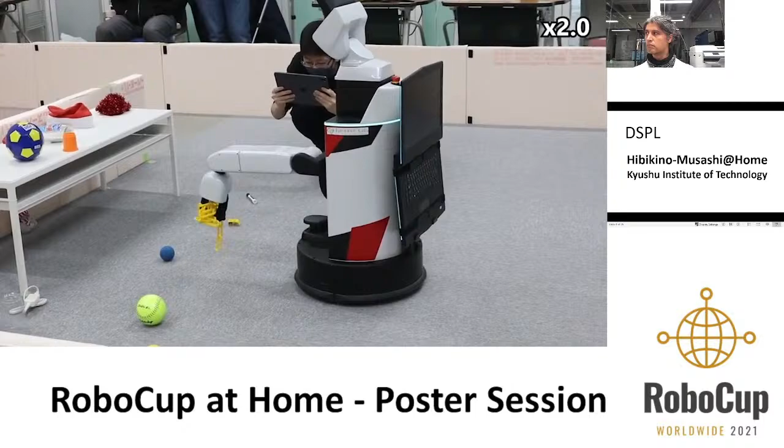Hello everyone, we are Hibikino Musashi at Home. We will introduce our techniques for our object recognition system.

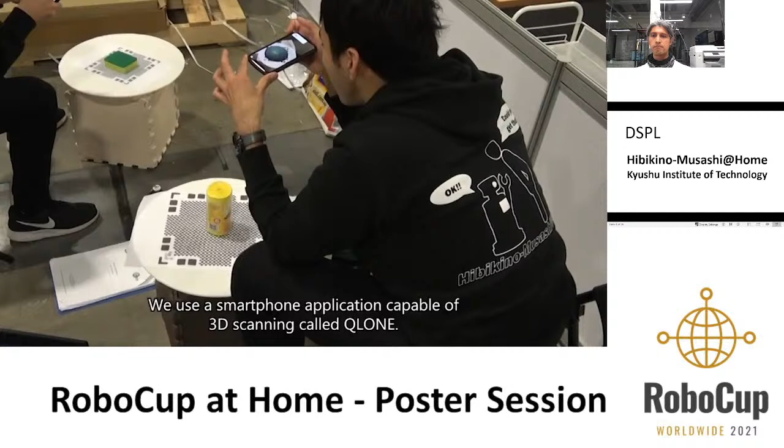We use YOLO for the image recognition system. We need to train YOLO with a large number of pictures. First, we create a 3D model of objects using a smartphone application capable of 3D scanning called QLONE. By using QLONE, we can easily and quickly create 3D models of an object by shooting it on a dedicated marker. We use a turntable to create a 3D model, however, in this method, the bottom surface of the object could not be shot immediately. Thus, we shoot two flipped upside-down object 3D models of the same object to make a complete 3D model.

Then, we combine 3D models of the object to backgrounds. For the backgrounds of the training images, we shoot background images, for example, a table, shelf, and other items. To adapt to various lighting conditions, we apply the automatic color equalization algorithm to the generated training images.

To incorporate the object images into the background images, we define several object locations on the background images. By placing the object images on the defined object locations, the training images for YOLO are generated autonomously. By this method, we can generate 400,000 training images from 15 class objects and 306 background images, for example. Annotation data for the training images are generated autonomously because object labels and positions are known.

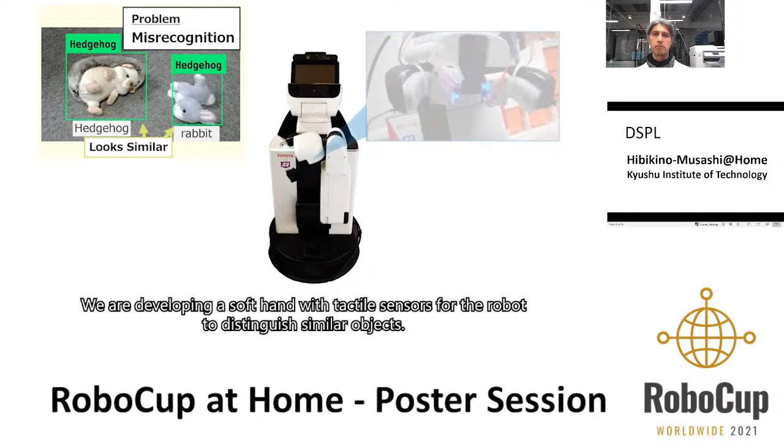The accuracy of YOLO is high, however, sometimes the robot can fail to recognize objects. This is an example of a misrecognition. Since the appearance of a rabbit toy and hedgehog toy is similar, it is difficult to distinguish them by using only the image. We are developing a soft hand with tactile sensors for the robot to distinguish similar objects.

This sensor is made of silicone rubber, liquid metal, and coils printed on a circuit board. When a force is applied to the sensor, the liquid metal in the sensor will flow, and the inductance of the coil will change. We can measure the hardness of an object by observing the change in the inductance of the coil. Since this sensor is soft, the shape of the hand is flexibly changed to fit an object. Moreover, the robot can avoid damaging objects.

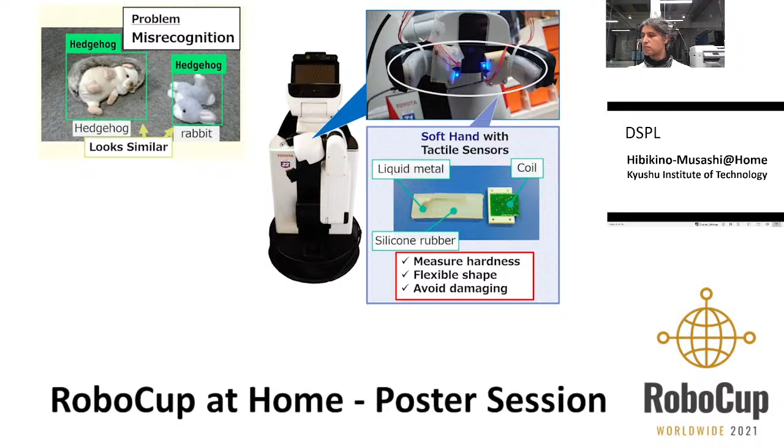We process the information from the sensor by a neural network. We use reservoir computing, a kind of recurrent neural network, to process time series information. Compared to a general neural network, the training cost of reservoir computing is low. We also develop a dedicated chip for reservoir computing. The computation speed of the chip is quite fast, and this chip consumes quite low energy, so it is suitable for the processor of the robot.

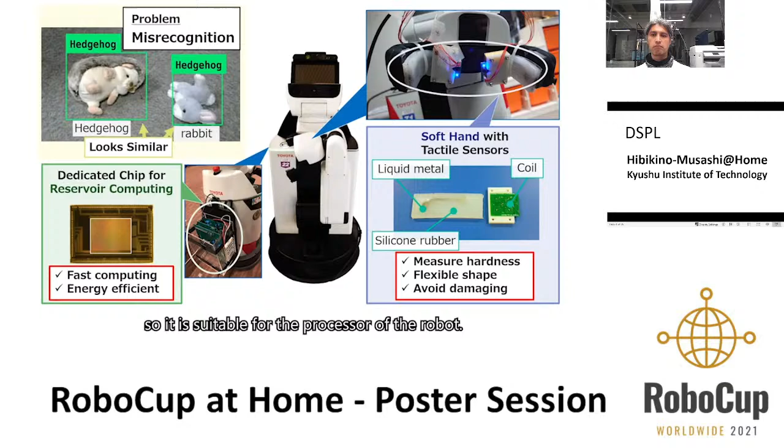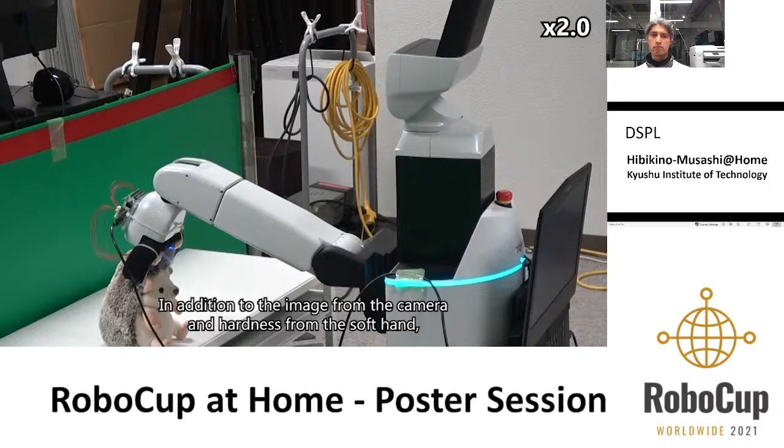By combining YOLO and the soft hand, the accuracy of image recognition can be improved. In addition to the image from the camera and hardness from the soft hand, various information such as the roughness of the surface and the weight of the object can also be utilized to recognize an object. This information can also be processed in the reservoir chip quickly with low energy.

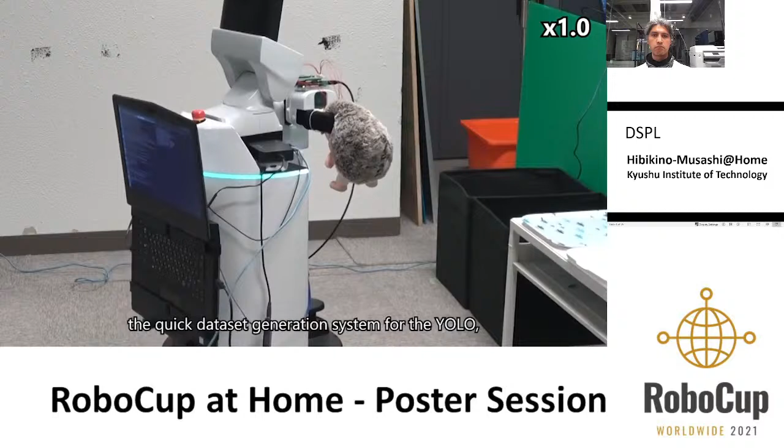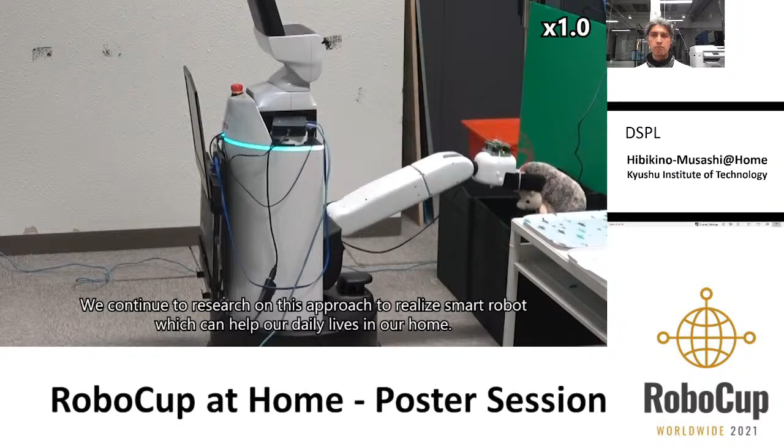We have introduced our object recognition system, the quick dataset generation system for YOLO, and a highly efficient analyzing system of the hardness of the object by a soft hand and reservoir computing. We continue to research this approach to realize a smart robot which can help our daily lives in our home.

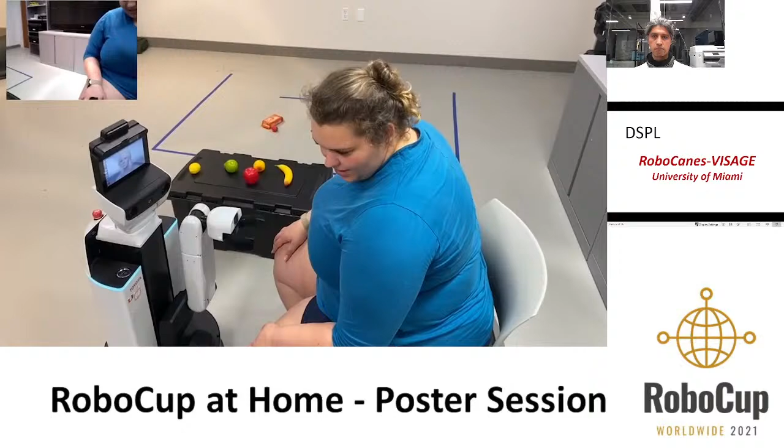What would you like to know about the weather in London? What's the temperature?

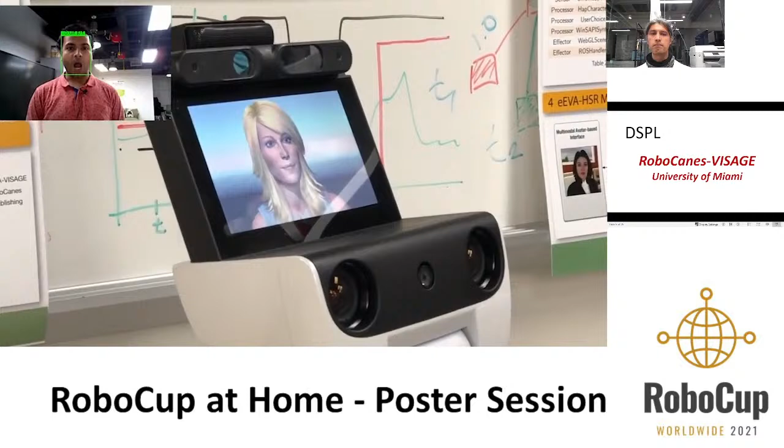For the last experiment, now I will mimic your head movements with the robot's head and mirror your facial emotion with my virtual person's face. The last topic is the weather in Tokyo, Japan. Are you ready? Yes.

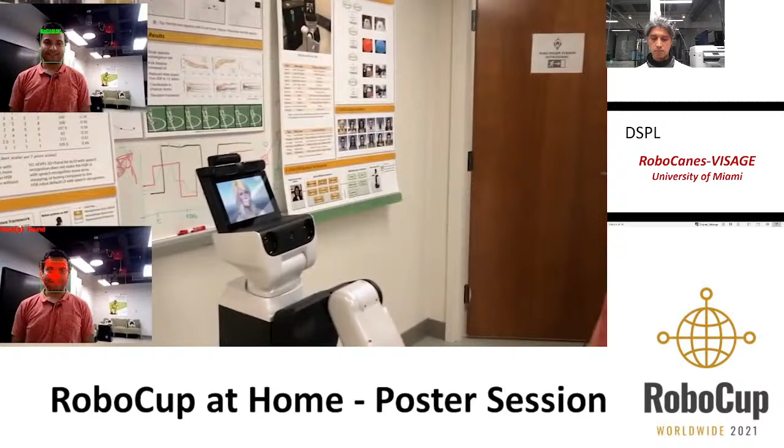What can I tell you about the current weather in Tokyo? What is the temperature?

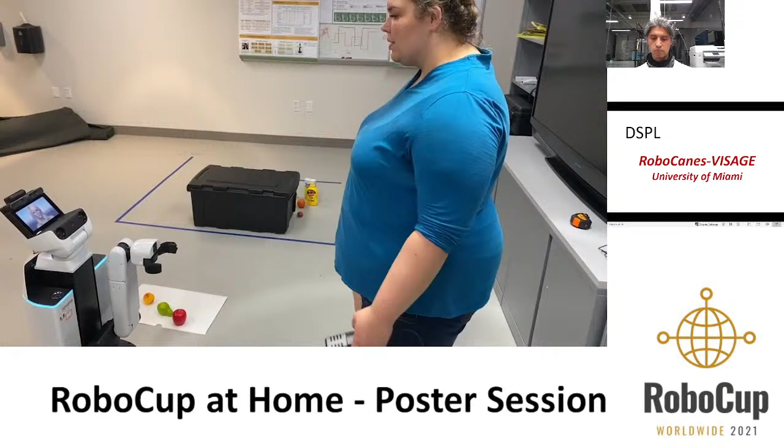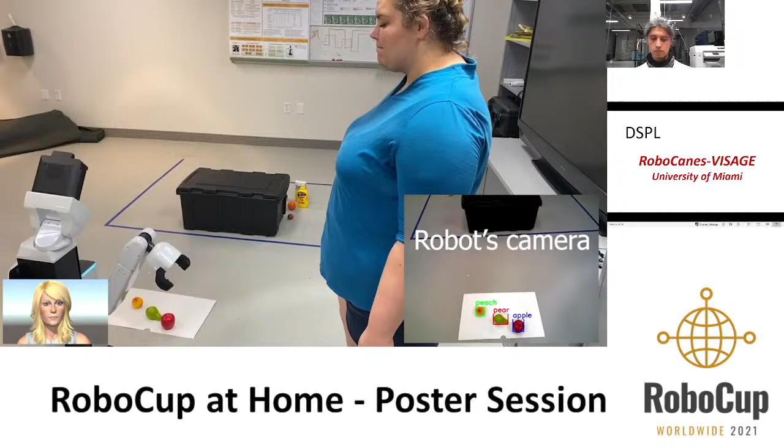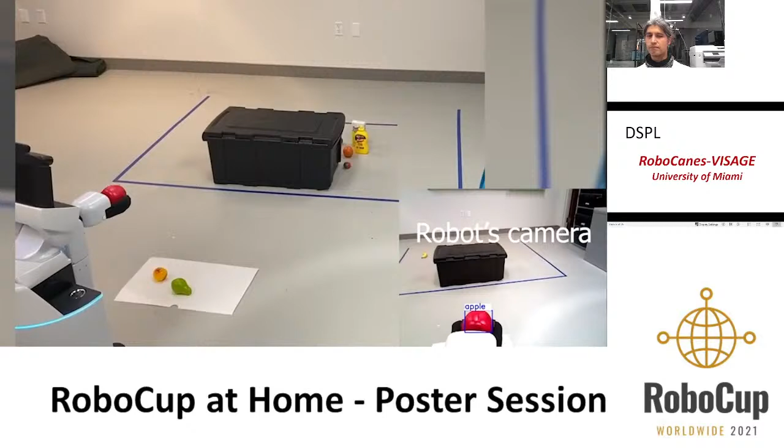Ready. Hey Popeye, could you bring me a fruit? Okay. I see a bunch of different fruit. What would you like me to bring? Could you bring me an apple? Okay, I will bring an apple. Here you go. Anything else I can help you with?

We'll start with CRAM, the Cognitive Robot Abstract Machine. CRAM is a software toolbox for the design, implementation, and deployment of cognition-enabled autonomous robots performing everyday manipulation activities. This allows for lightweight reasoning mechanisms that can infer control decisions, which allows the plans to be more flexible and reliable.

The symbolic expressions and the knowledge representation are grounded into the perception and actuation routines, and also into the essential data structures of the control program. CRAM thus makes the requirement to state the whole domain in an abstract knowledge base obsolete.

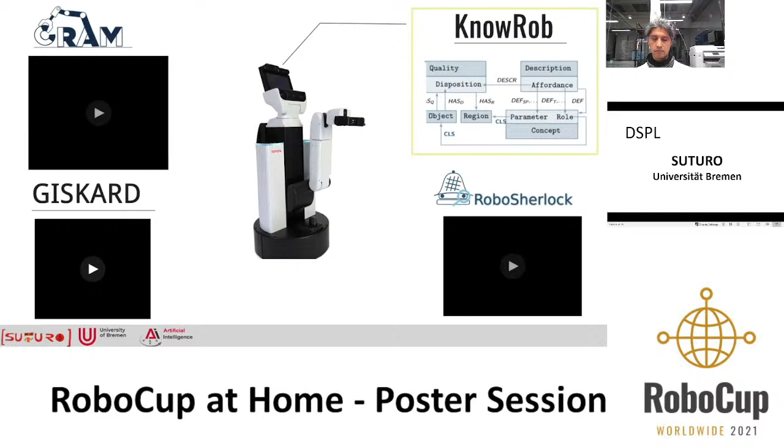KnowRob is an open-source knowledge processing system designated for autonomous service robots. It represents the agent's environment and belief state with axiomatizations using the web ontology language OWL.

Recently, the Institute for Artificial Intelligence enhanced KnowRob's functionality by developing SOMA, an ontological model that extends the agent's capability to perform everyday manipulation tasks. A key feature of this library consists of the fine-grained action representation.

Since autonomous agents must often cope with shallow and symbolic instructions, they must be able to fill those informative gaps with detailed, grounded, and real-value information.

RoboSherlock is an open-source framework for cognitive perception. It allows the creation of different perception pipelines to appropriately handle a wide range of scenarios. Internally, it is based on the Unstructured Information Management architecture (UIMA).

The different computational units are implemented as annotators, which can be seen as experts for a given perception task. The results of those experts are then combined to find the best solution. Annotators are currently implemented with the usage of OpenCV and PCL libraries.

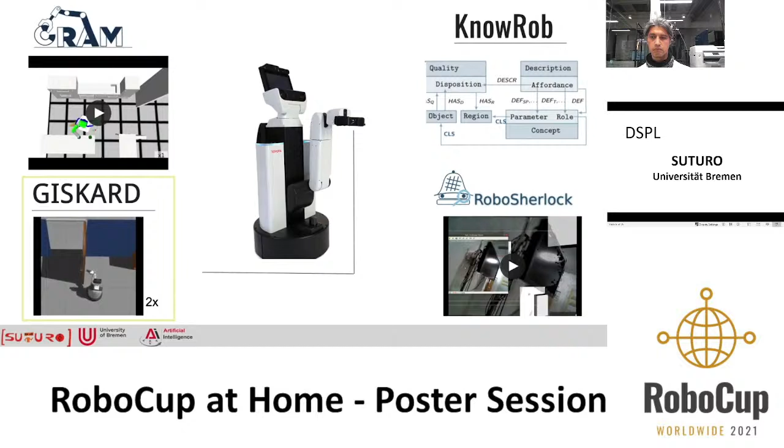These problems include motion constraints such as keeping a liquid container horizontal or basic grasp positions. Giskard plans full body motions that satisfy the goal description as best as possible.

In the following footage, we will show how the HSR manages to perceive the surrounding and navigate through the environment.

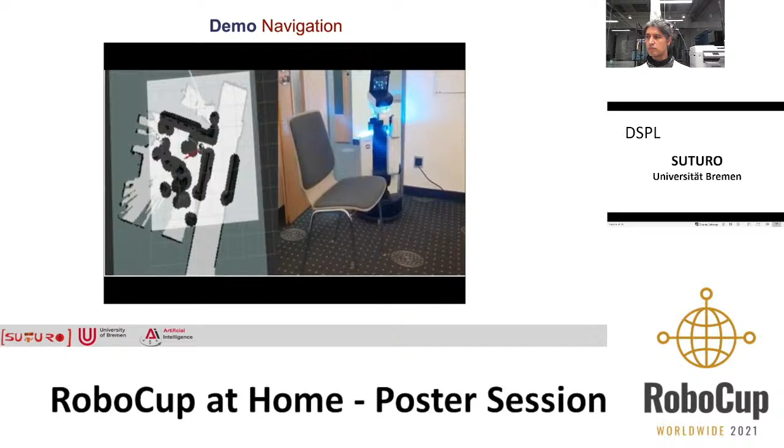The agent observes the floor and any possible obstacles lying in the way. In case such an obstacle is detected, a collision is avoided by slowly navigating around it.

Lastly, we demonstrate a simulation of our SUTURO system using the HSR. In this case, we will show how the software components of the Institute for Artificial Intelligence interact with each other during the cleanup plan.

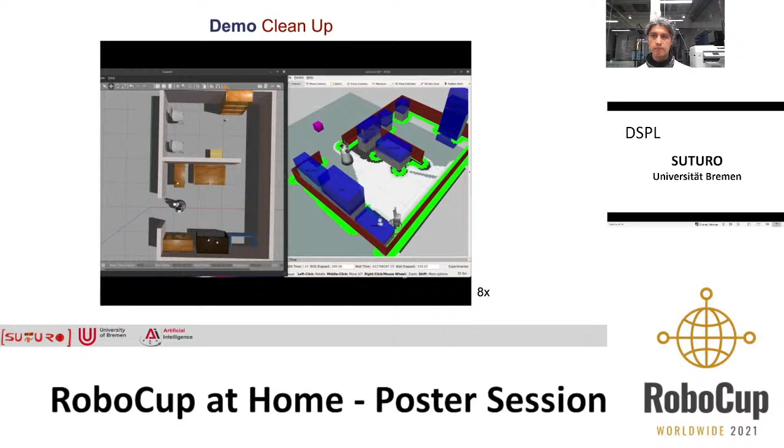The agent enters the arena and takes notice of the existing surfaces.

By navigating to the first surface, RoboSherlock perceives the existing objects. The observed object type is then validated against KnowRob's vast ontology entries.

From the determined object type, KnowRob then infers how the object can be grasped and where the designated placing area is. The motion control framework Giskard can then slowly grasp the object from the surface and navigate to the destination of the bucket.

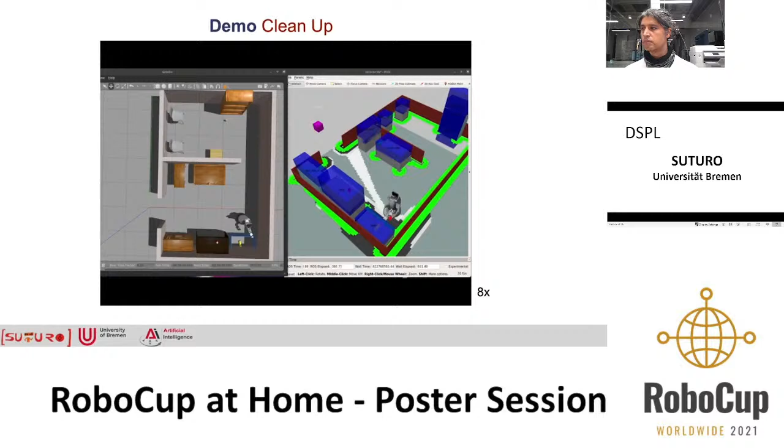This is repeated with multiple objects on several surfaces.

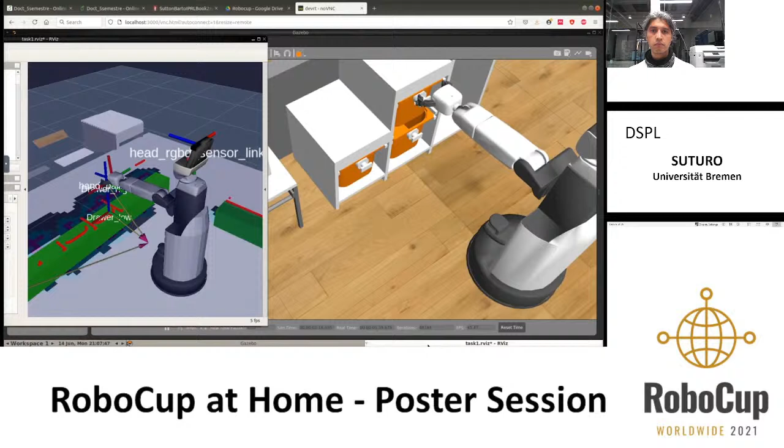Using a similar approach, we are able to open the drawers. Hand coordinates with respect to the transform of the drawer knob are used for small local adjustments when we are close enough.

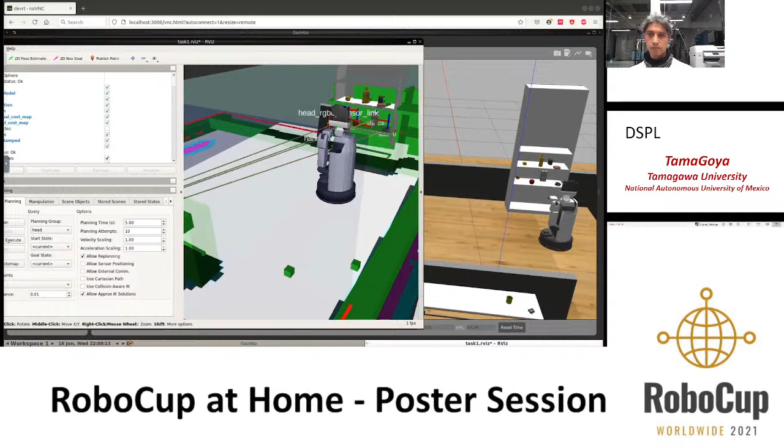In this example, you can see how successful segmentation was done to later use point cloud information for object pose. Principal component analysis is used to estimate object pose.

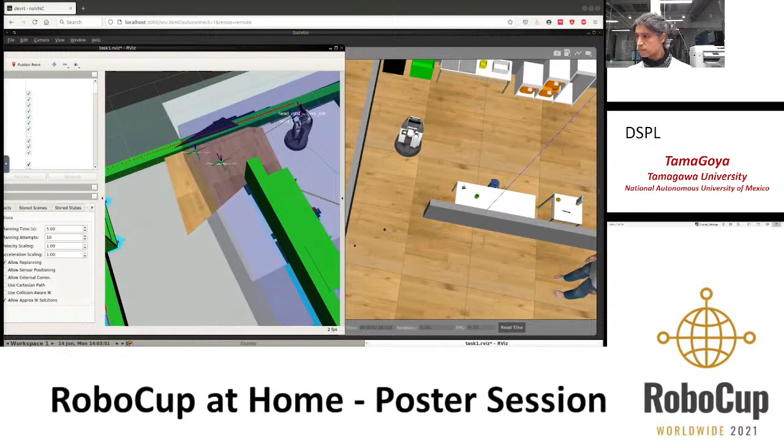Detected obstacles are mapped as collision objects, so the robot can plan through them without colliding.

We also developed our own obstacle avoidance system using the map server. You can see here how we mapped the obstacles to the server, and then we can navigate.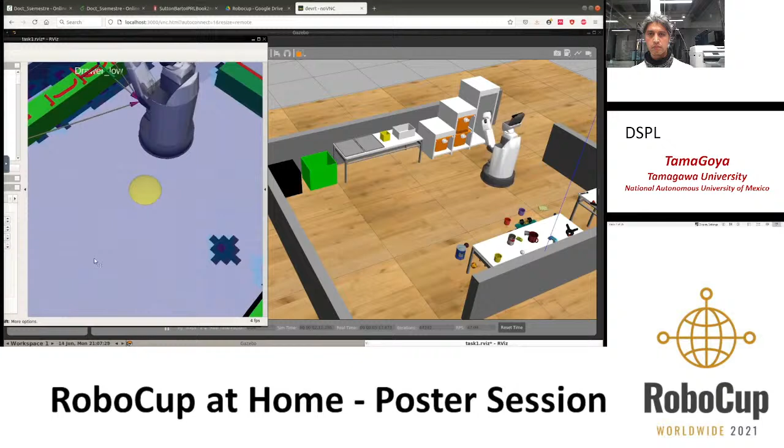Using a similar approach, we are able to open the drawers. Hand coordinates with respect to the transform of the drawer knob are used for small local adjustments when we are close enough.

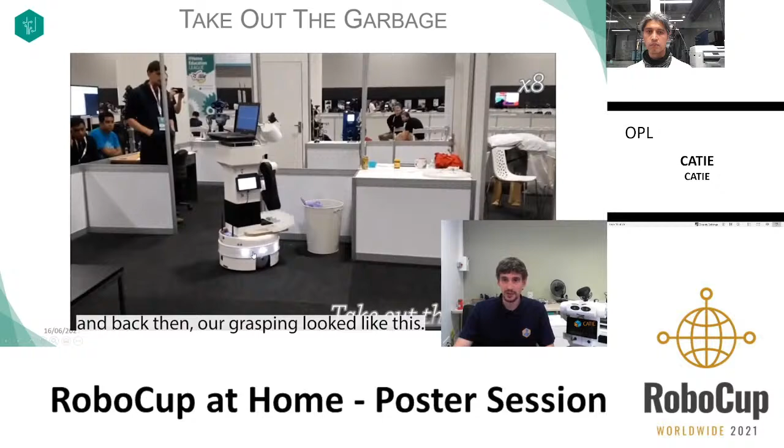The second thing I wanted to discuss is the grasping capabilities. Our first competition was in 2019, and back then our grasping looked like this. The fingers were just rigid and had no sensing, and we mainly used the force and torque sensor in the wrist to make things a little bit more robust.

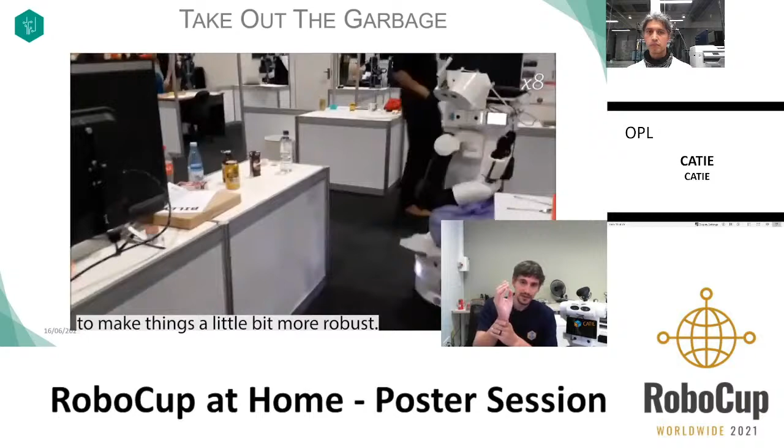So what we did is that if the sensor felt that a force was abnormal, the arm would just let it go, instead of forcing against it. In a way that made our movements more robust, because if a human or a tactile interference would happen, the arm would just adapt and then do it again.

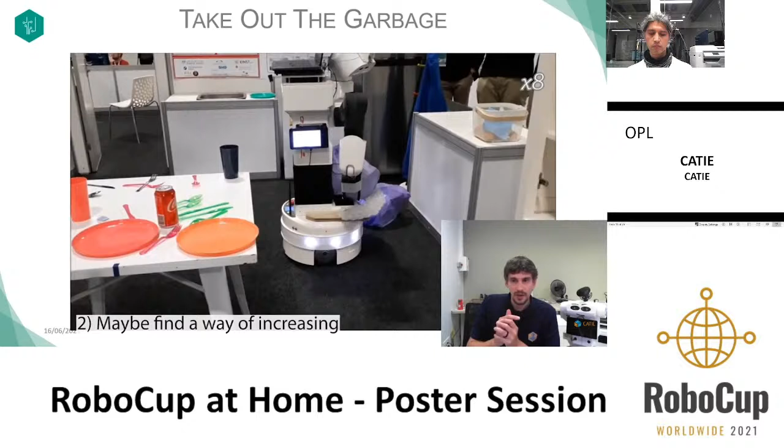This was very useful when we were grasping big stuff like the garbage, but it wasn't enough when we tried more complicated graspings. In some cases you really need to know if you managed to grasp or not. With the bag, it was heavy enough that we could just take it up and verify it weighted, but when trying to grasp small things, we need to know if we grasped it, and maybe find a way of increasing the accuracy of the arm movement.

So to do that, we made new fingers. The first version of the fingers looked like this. The second version looked like that. And the final version looked like this.

So how does it work? We added force sensing inside the fingers, more like pressure sensing, but kind of the same. This way we know if we have something inside the gripper, because you can't just rely on whether it's closed or not, since sometimes you will just pressure something that can be crushed.

In this example, we show that we can grasp fragile items without breaking them. The other modification we made is that we added a suction cup to grasp items that are otherwise very difficult or almost impossible to grasp. For example, in RoboCup at Home, it would be a plate, and in this case, a sticker.

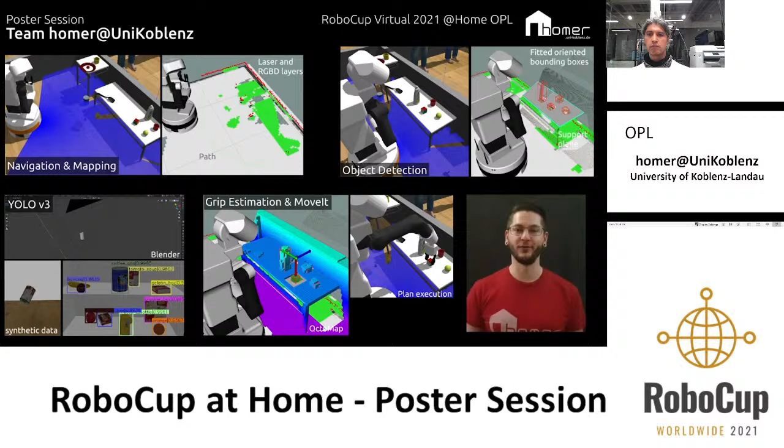Thank you for your interest in our approaches, and fingers crossed for an interesting and successful competition.

We are the Leeds Autonomous Service Robots team, or LASR, from the University of Leeds in the UK. We are a team composed almost entirely of undergraduate students, and this is our first RoboCup. In the last couple of years, we built the infrastructure from the ground up, and more recently we've focused on two themes that we're going to describe here: human-robot interaction and robot manipulation.

For human-robot interaction, we devised an anonymized feature vector that we use to recognize the same person between interactions with the robot. We use it, for instance, for person following, to follow a person in a room with other people, or in leading someone, to let the robot turn around and recognize that the same person is still following it.

We also used OpenPose to process the skeleton of the person for different tasks. For instance, here we show recognizing that a person in a coffee shop is trying to get the attention of the robot by raising their hand or waving, and by looking at what the person is pointing to, because they may want to describe an object to the robot or tell it to pick it up. Here we look at exactly where the person is pointing, and if there is more than one object in that area, the robot will ask questions to disambiguate.

We also developed a navigation module that is object- and human-aware, in the sense that when there is an obstacle blocking the path and it's not possible for the robot to go around it, the robot will determine what kind of obstacle it is—a person, a large object, or a small object—and depending on the categorization, a different handler will either ask the person to step aside, pick up a small object, or try to push aside a larger object.

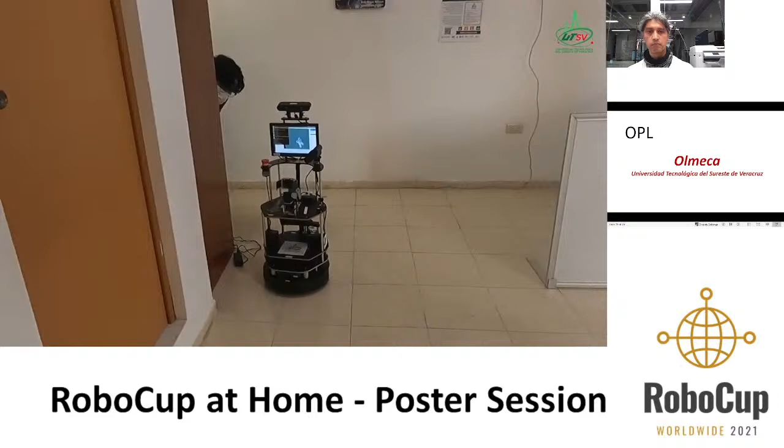My name is Melvin Ramon Leal Quiroz. My name is Johan Lopez Castillo. My name is Daniela Saray Cruz Hernandez. We are students of the Technological University of the Southeast Veracruz, located in Mexico. We are studying the 6th semester of mechatronic engineering in the automation area. We are from the Olmeca team.

We are participating in the International RoboCup at Home 2021 tournament in the OPL league with our service robot Hoverbot. I would like to mention that it is the first time the university is participating in this tournament. We are excited to have reached the final. Good teamwork was achieved. During our practice, we experienced voice recognition and spatial vision. We also used motor control to control our robotic arm. We wish to continue implementing this robot in activities within the school in a post-COVID context.

Greetings everyone, I am Justina, a member of Team Pumas from the National Autonomous University of Mexico. I'm very happy to be here competing in this edition of RoboCup. Now a member of the team will present my technical specifications. Justina is a service robot designed for operation in domestic environments. Its friendly and smart design allows...

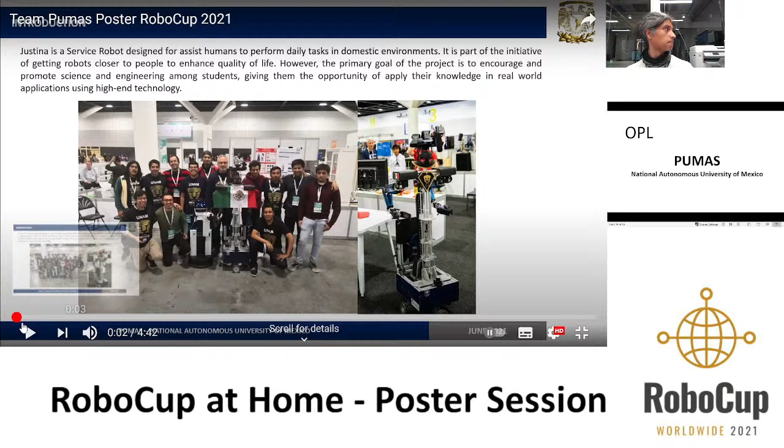Greetings everyone, I am Justina, a member of Team Pumas from the National Autonomous University of Mexico. I'm very happy to be here competing in this edition of RoboCup. Now a member of the team will present my technical specifications. Justina is a service robot designed for operation in domestic environments. Its friendly and smart design allows interaction with humans and their environment, while taking advantage of low-cost components available in the market.

The main goal of the project is to encourage and promote science and engineering among students, giving them the opportunity to apply their knowledge in real-world applications using high-end technology.

Service robots are hardware and software systems that assist humans to perform daily tasks in complex environments. To achieve this, Justina has the following components: one mobile base using omnidirectional wheels, two anthropomorphic arms with 7 degrees of freedom, two speakers to generate synthetic speech, a Microsoft Kinect sensor as RGB-D camera, one directional microphone, and an array of 4 microphones to detect sound sources. A laser allows Justina to create a map for navigation.

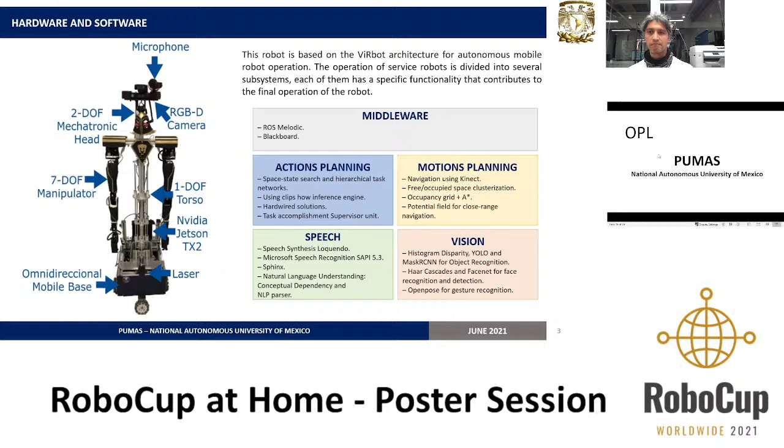Justina uses Microsoft speech recognition and natural language understanding to interpret language. Besides, the conceptual dependency is used to find the structure and meaning of the sentence. Justina uses YOLO for object recognition in real time.

For face recognition, we use an artificial neural network called FaceNet, and TensorFlow for face, age, and gender recognition. Also, we use OpenPose for human key points detection.

Our algorithm uses the point cloud to create a 3D skeleton, which is used as the input of a hidden Markov model to estimate the most probable gesture.

To recognize an object, a raw color segmentation is performed, and a principal component analysis is implemented on each mask for category identification. This allows the calculation of the robot end effector angles for object manipulation.

Besides, in our laboratory, we have the vision that in the future we will have a variety of robots performing specific tasks, and we propose using Alexa to communicate with all these robots.

The communication between Justina and Alexa consists of a local network where an Echo device is waiting for a user command. When a command is heard by the Echo, it is sent to Alexa Voice Service for recognition, and a request is sent to the local network.

To attend the request generated by the AVS, a web service node is created detailing the command. Finally, a CD primitive is generated and sent to Justina for execution.

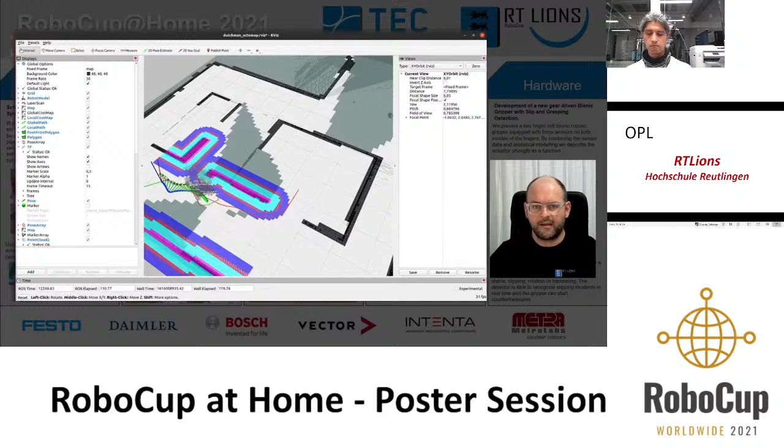A more optimal approach is to adjust this safety distance according to the class of an obstacle. For class prediction, we trained an image processing convolutional neural network.

One of the main problems in developing and training any neural network is creating a training dataset. We used methods and free open source software allowing fast generation of annotated datasets. Our pipeline can then be applied to various objects and environment settings, and is extremely easy for anyone to use for synthesizing training data from 3D source data.

We created a fully synthetic industrial environment dataset with 10,000 physically based rendered images and annotations. Subsequently, we trained a CNN with our dataset for cost map safety class prediction.

We analyzed different class combinations and showed that learning the safety classes end-to-end directly with a small dataset, instead of using a class lookup table, improved the quantity and precision of the predictions.

We proposed three different class groupings on our dataset for our experiments. First, all dataset objects as their individual class. Second, similar objects grouped by type classes. And third, objects directly grouped into safety classes.

The manipulation team worked on a novel approach for picking up objects. We generate volumetric 3D environment models with Octomap. The error in range measurement is usually very high, so updated environment mapping in real time is necessary. Octomap is an integrated framework based on octrees for representing 3-dimensional environments.

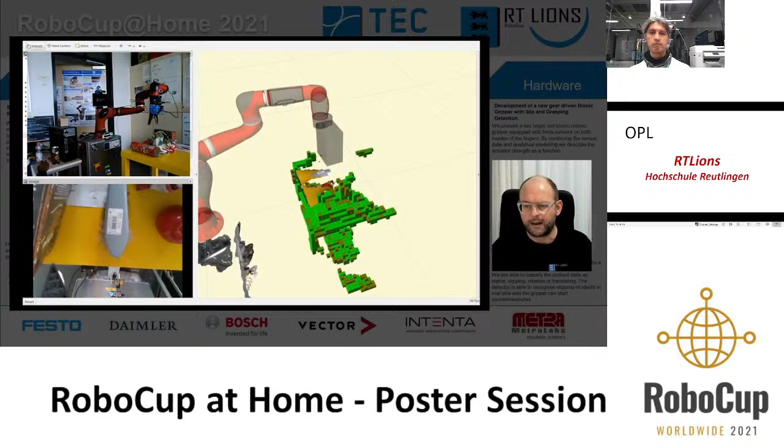We use this new method not only for navigation but also for gripping tasks. This also supports gripping point detection and orientation of the objects.

In parallel, the team also had to handle simulation challenges of picking a virtual object with a home service robot. Many experiments and trials took a lot of time, and finally there were more and more successes.

The perception team worked on synthesizing training images in Blender. The semi-automatic script can generate thousands of RGB images in a few hours. The objects are then extracted and combined with an artificial background corresponding to the simulation arena. In this step, the labels and positions of the objects are also stored.

In a second approach, an arena scenery was built in Unity 3D, including random YCB objects in the shelf, on the table, or on the floor. Again, the labels are also generated by Unity, so no manual annotation had to be done for this year's challenge. The training data was then trained on the Darknet YOLO network, and we achieved a high recognition rate.

Our brain combines all modules and orchestrates all states of each challenge. The tool we used is called FlexBE, which supports the creation of state machines for robot programs. The specialty of FlexBE is the graphical interface, the hierarchies of state machines, and the integration of internal and external Python code.

The communication between modules was done by ROS topics and messages, which is also controlled by FlexBE. Additionally, the brain controls the Docker containers and the applications inside the containers.

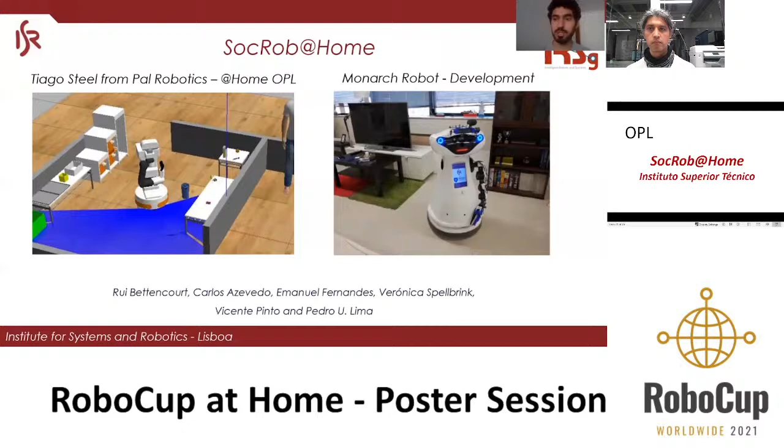We usually use this robot on the right called Monarch robot, but for RoboCup simulation, we will use Tiago Steel from PAL Robotics. Our functional architecture can be seen here. We will only be using the bottom since we don't need human interaction. We basically use object perception, navigation, and manipulation to complete our goals, combined with task planning.

Our object perception is based on Darknet YOLO. We have two detectors working. We have a generic detector that detects more generic objects we usually see in our environment, like people, chairs, or tables. The specific detector is used depending on the competition. Every competition has a specific dataset of objects we need to recognize, and so we train this specific detector for each competition. The detection from YOLO and the information from the depth camera is then used to determine an estimation of the pose of the objects.

This is then fed to an extended Kalman filter that outputs the actual pose estimate of the objects throughout time.

For navigation, we represent the world through a map that we generate by using FastSlam 2. This map is then used also for localization as well as the laser scanner and the odometry by using the AMCL algorithm configured to our robots.

Then for the navigation planning, we either use the navigation stack's planners like DWA and Dijkstra algorithm, or we use the navigation stack created by a researcher here at ISR that has two modes of navigation: a waypoint navigation based on the fast marching method, or a navigation that follows a dynamic goal using a variation of dynamic window approach.

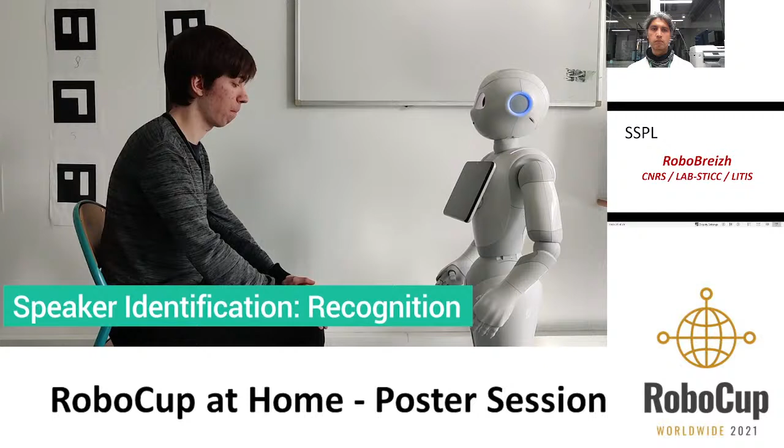We want to present recent research of our laboratory consisting of a telepresence robot focused on providing mental health care for COVID-19 patients, named Voodoo. The development of the robot took a four-stage approach.

A first step of design was taken in order to address the requirements of the hospital. This work was done in a period of 4 weeks, thanks to the previous experience of the team in RoboCup at Home competitions. A first visit to the hospital with the working prototype was carried out.

During this visit, how the robot interacts with the hospital's infrastructure was analyzed. In addition, the hospital Department of Healthcare and Associated Infections analyzed the robot and defined the requirements for its future operation in the hospital. During following visits, the robot was operated by a psychointensivist and it interacted with patients.

This experience was very successful, but two other requirements arose: the need for controlling the tilt angle of the camera for proper interaction with patients lying or sitting in different positions, and the need for having microphones with noise cancellation to filter the noise generated by equipment used in the ICU.

A final validation was carried out in a third visit. During this visit, the robot was inspected, and we got the final approval from both the HAI department and the ethics committee for using the robot inside the hospital.